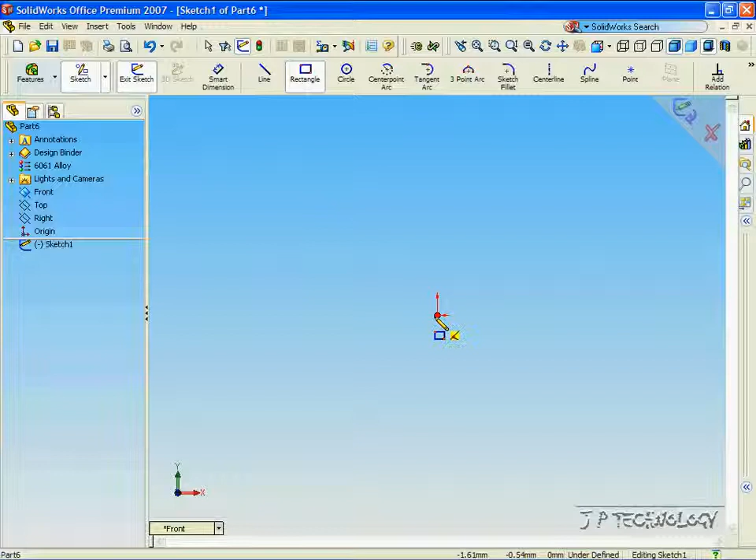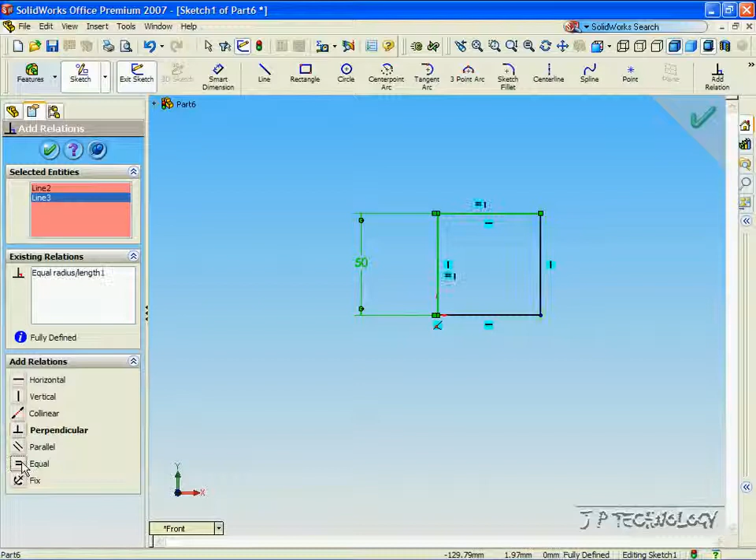Now, to extrude a part in SolidWorks, we first need to make a sketch. So let's click Sketch, click Rectangle, click the front plane, and from the origin, let's draw a square. Now, to make this square exact, let's use the Smart Dimensioning tool, and let's make it 50 millimeters. And with the Add Relation button, click the length that we already made, and click the perpendicular line, click Equal, and now we've made a perfect square. Click OK.

Now, to extrude the drawing, click Features, click Extrude Base, and you can see what our extrude will look like.

Now, in this tutorial, I will be covering just a few of the actual extruding options. All the different extrudes are listed below. The ones I'm going to be covering is the blind extrude, up to surface extrude, and the mid-plane extrude. The up to surface extrude is exactly the same as the up to vertex and up to body extrude. So I'm just going to show you one and you can do the rest for yourself.

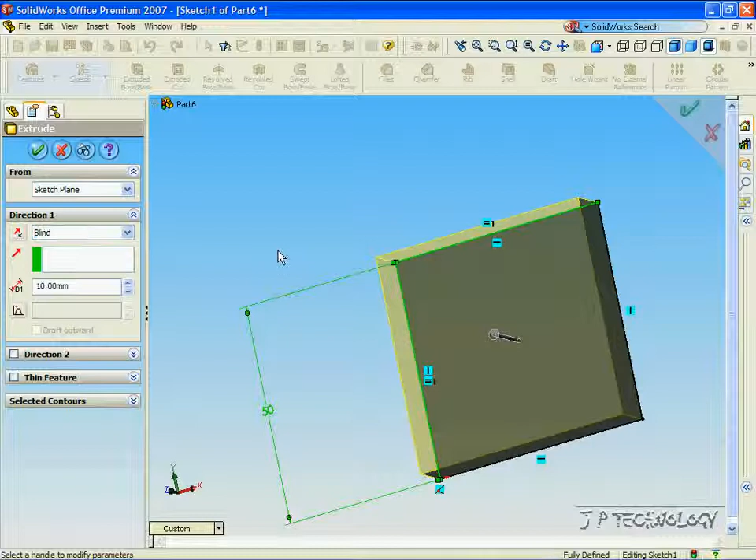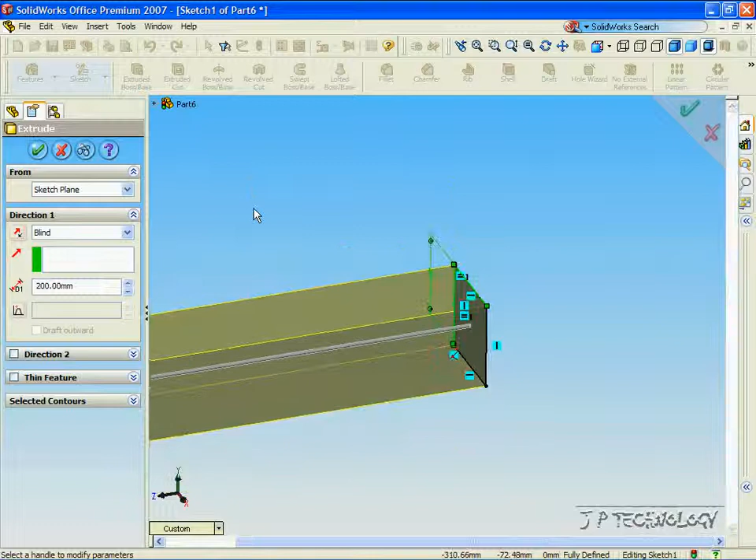Okay, so for the first one, we're just going to do the blind extrude. So click blind. For the blind extrude, it just comes out from the drawing as much as you want. So right now it's at 10 millimeters, and as you go up, it comes out more, and as you go back, it goes back more. So for this square, let's make it 200 millimeters. Click enter, and now you see a preview of what it will look like. Now to accept it, press the check mark, and you're done.

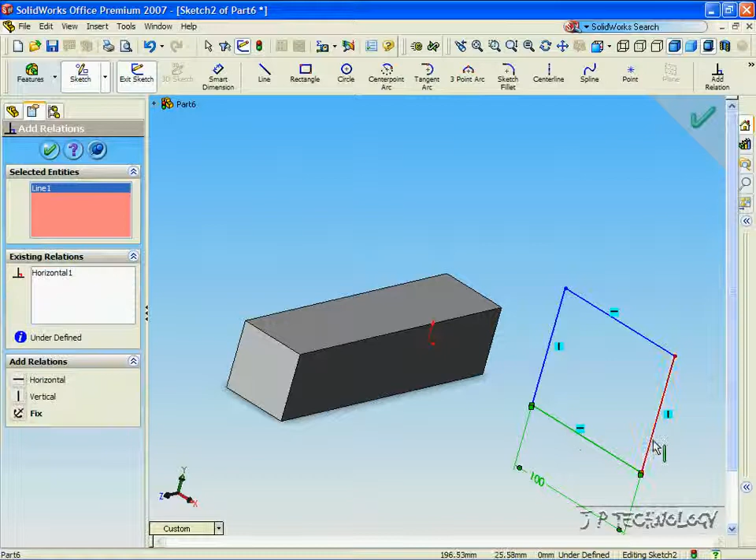Now, let's go to the front plane, and we'll draw another square right beside it, going across the dotted line so it's still on the origin. Click Smart Dimension, and let's make this square 100. We'll use the Add Relations button again, click one length and the perpendicular length, and click Equal. Now we've made a perfect square again. Click OK.

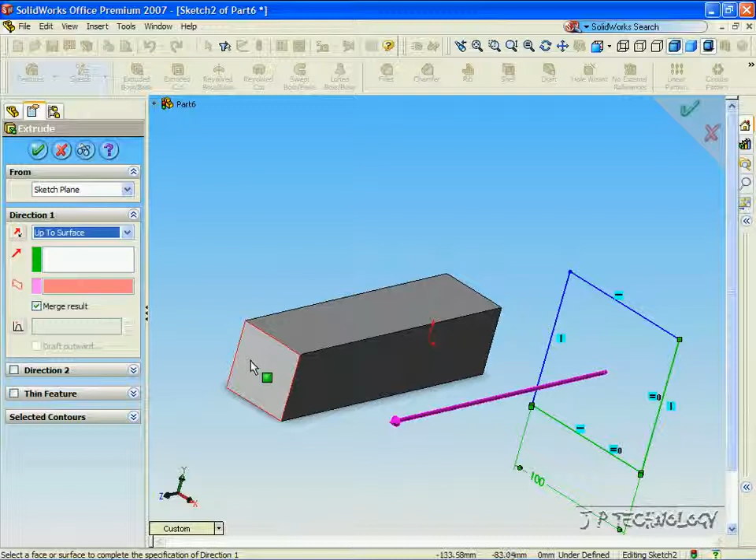Now click Features, click Extrude, and for this one we are going to extrude up to surface. All we have to do is click the surface we want to extrude up to, and now it shows the preview of that sketch being extruded up to that surface. Now click OK, and we have that.

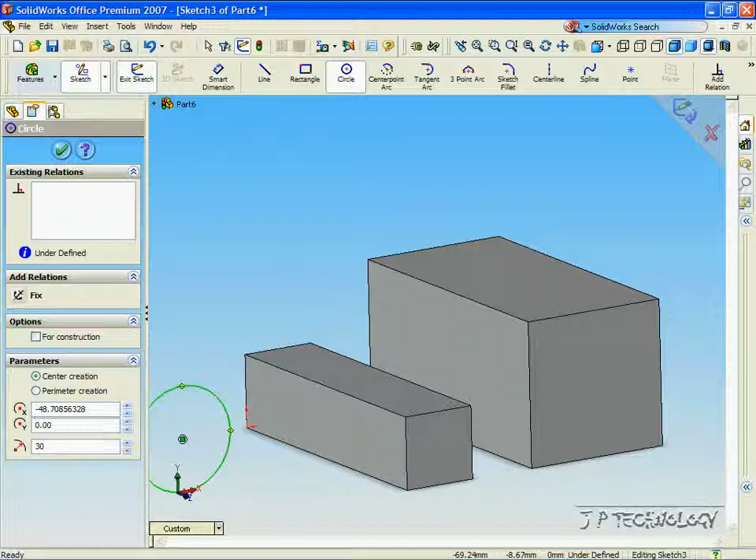Now click the front plane again, click Sketch, click Circle, and across the origin again, we'll draw a circle this time, and we'll type in 30 as the radius. Click Enter, click OK, and for this one, we're going to extrude it through the midplane.

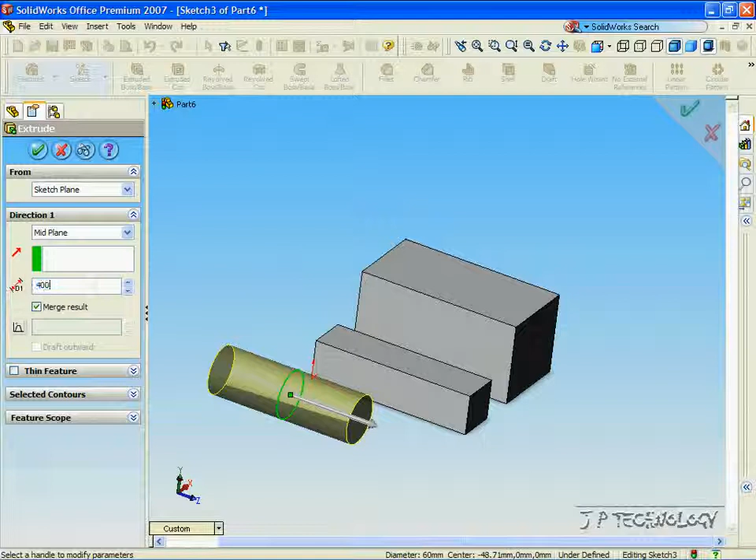Now, a midplane extrude starts off at the green circle, and it goes out equally on both sides. It's like the blind extrude, just that it goes halfway out one way and halfway out the other way. As you can see, as we increase it, both sides increase, and as we decrease it, both sides decrease. For this one, let's make it 400. Click Enter, click OK, and now we've extruded through the midplane.

And that does it for the extruding tutorial.